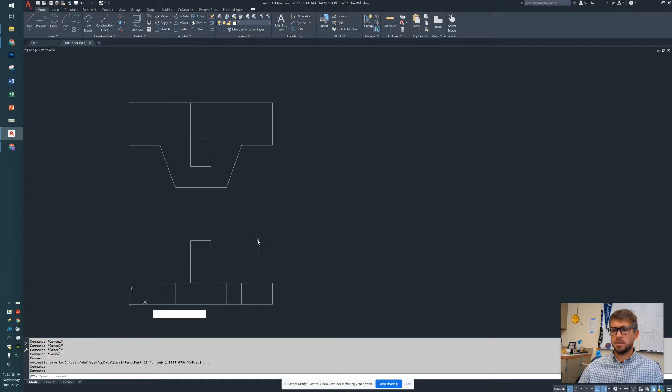All right, now we've got the tools and all the lines we need to be able to make that right side view. We're going to go ahead and turn our guidelines back on. And then I'm going to need to carry some of these over again. So I'm going to get to my guidelines, make sure I'm on my guidelines.

And the first thing I'm actually going to do is offset. I'm going to offset that line 20. I got to go over 20. So I'm going to offset it 20. And we'll extend it down. Push escape. 20 offset. And then I'm going to go over this one. I didn't click it down.

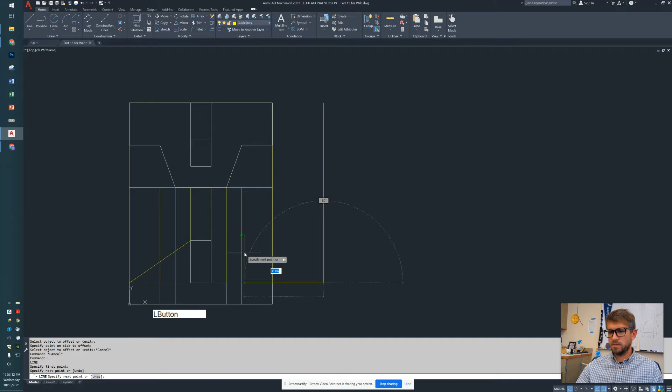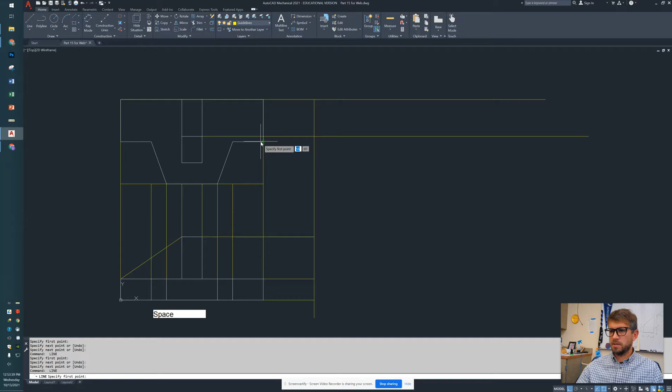Now I can start carrying over some lines from my front view. Anywhere that I've got an edge, I can utilize it, right? And I've still got ortho on, so this is working out pretty easy for me. And using my O snap and my perpendicular endpoint O snaps, okay? Now I can do the same thing with the top view. Anywhere I have an edge, I'm just going to draw it out here a ways, and you'll see why in a second. Anywhere there's going to be an edge, I'm going to hang them out here.

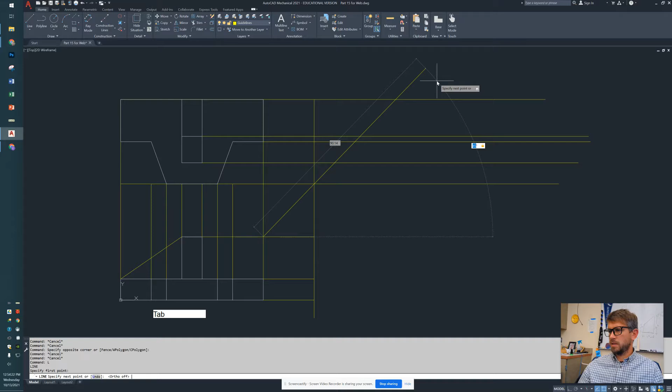Okay. Then since these two objects are 20 millimeters from each other, my front view and my right view edges are going to be 20 apart from each other. We can utilize this point right here, where the top surface and the edge would meet. We can use that intersection, and I'm going to push up a line that's going up at a 45-degree angle. I could define the length, right? Or I push tab and I can define the angle. So now I've got a 45, and I need to extend it past those lines.

Okay. So now I'm going to use my trim tool to trim these up. I'm going to go ahead and get rid of those right here, and then I can start carrying these lines down. I actually want this one out here a little ways farther, F8, because I need to carry all those lines down to that top surface. Anywhere I have a line that met this 45, I'm going to carry it down. Those are going to be where my object lines up. Okay, so perpendicular lines there. And we could carry this out here as well.

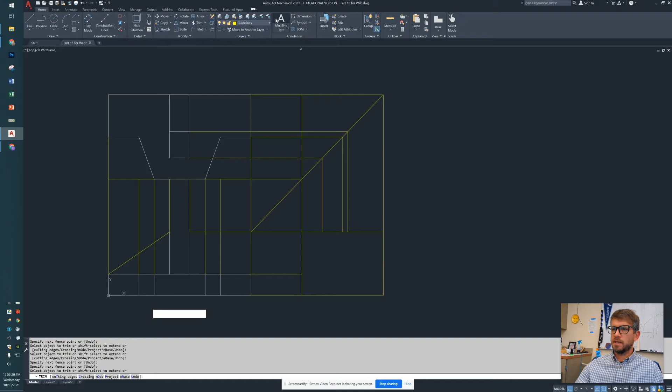And I'm going to use my extend tool, EX for extend. And then I'm going to trim these off. They're kind of erroneous. So now I've got everything I need to be able to build this object correctly. I've got my guidelines here. I'm going to switch over to my first layer. Now I'm going to push my line tool again. I've got to trace this line, and we can work this bottom edge, and then I've got to come out to here. Okay. So those are the first things I'm going to do.

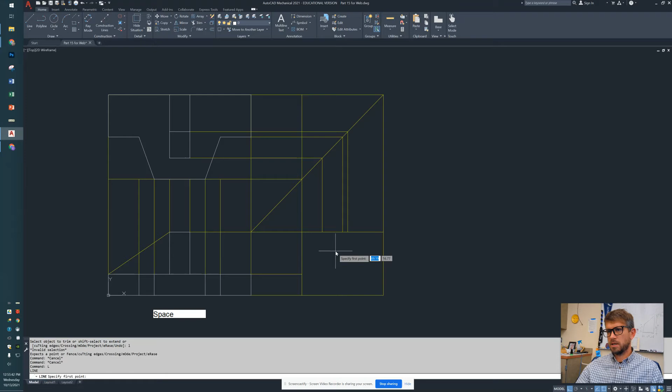I'm going to draw my line, and I'm just going over the top. I'm clicking on these, and then this is where that edge starts to come down. So I got to come to this one. This line was for the outside of the object. That's a different point. And then it's going to come down here. We don't know the exact angle just yet, right? Like how far is that going to come out? So we could extend this down to this edge, and that's how far that front point is going to come back. So I can draw a line from here to there, and then I'll come up to that point. And now we've got our angle that we needed, okay?

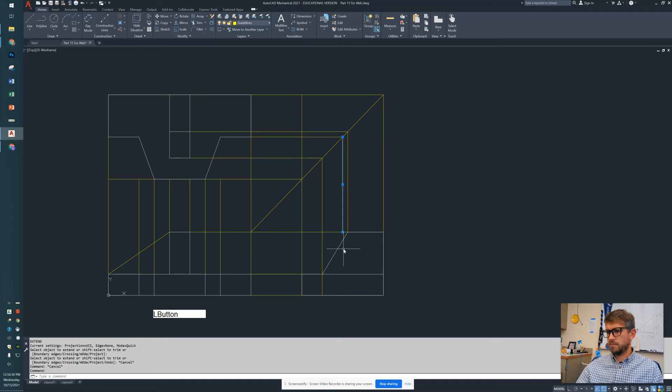I'm going to use my extend, because this actually needed to go all the way to the end. And then we just need a line right here. So we can just draw a line from that point right there. And then we will trim it. We'll just cut it up, and I got to make sure I get that top part. And I believe we're done if we go ahead and turn off our guidelines and see what our final product looks like.

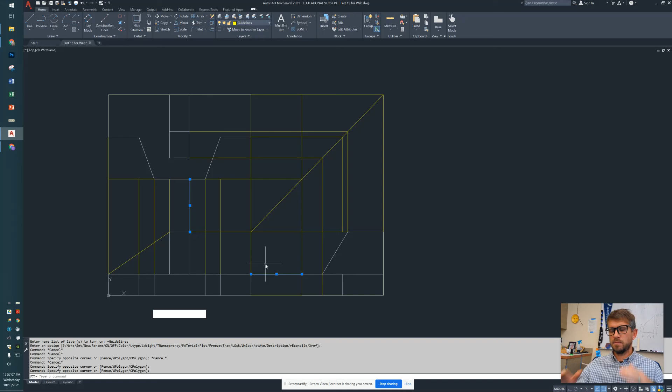So utilizing that 45-degree technique on this intersection right here, we're able to transfer lines horizontally and then vertically. And the key part about that, again, is that the spacing, that line and that line are both exactly the same. They have to be. If we wanted to space those views out more, then we'd have to have a bigger number. But as long as that gap from the top view and the right view is the same, then this 45-degree technique will work. And bam, we did it. Good work.